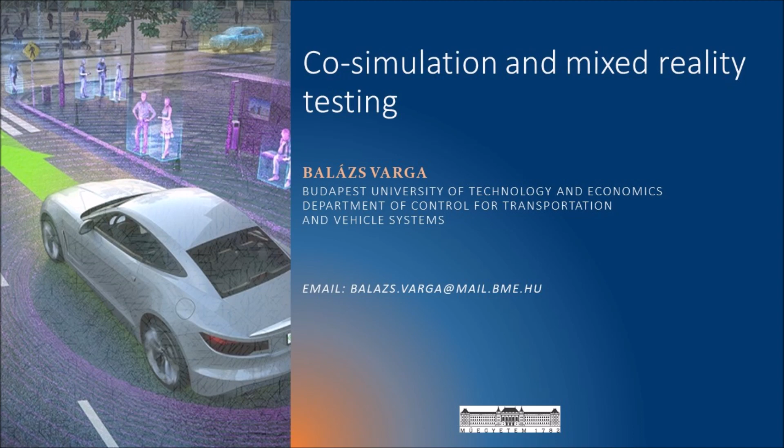Greetings everyone. In this presentation, I am going to talk about some trends in the testing of automated and highly autonomous vehicles. I am going to do this via giving you some definitions and examples of some buzzwords that are currently being thrown around in this field. The examples I am going to show you in this presentation will be mostly from our department.

We will start from an engineering perspective. First, talking about simulation, computer simulation in the field of autonomous and highly automated vehicles. What do we test? How do we test them in this field? And then we will move on to more complex topics. We will see how we can connect different simulators to perform some cosimulations, and then we will see how we can connect real objects to our simulations to perform mixed reality and digital twin testing.

I am also going to talk about the computer visualization counterpart of these topics, and I will give an outlook on virtual reality, the purpose of virtual reality in testing, and then the purpose of augmented reality in testing.

So what's the purpose of simulation in autonomous vehicle testing? Simulation is cheaper, faster, and safer than performing real vehicle tests, especially when the development is in an earlier phase, when we already have some function, but we do not have the vehicle ready. Then we cannot do it with a real vehicle. We have to limit ourselves to simulations.

In this video, you can see the software IPG CarMaker in a scenario where the ZalaZone test track is modeled and the vehicle is performing some tasks or maneuvers there. For example, you will see a pedestrian dummy that goes in front of the vehicle, and the vehicle does an emergency brake. And you can also see the force vectors next to the wheels, which indicates that this software can simulate accurate vehicle dynamics, and basically that's what it is for.

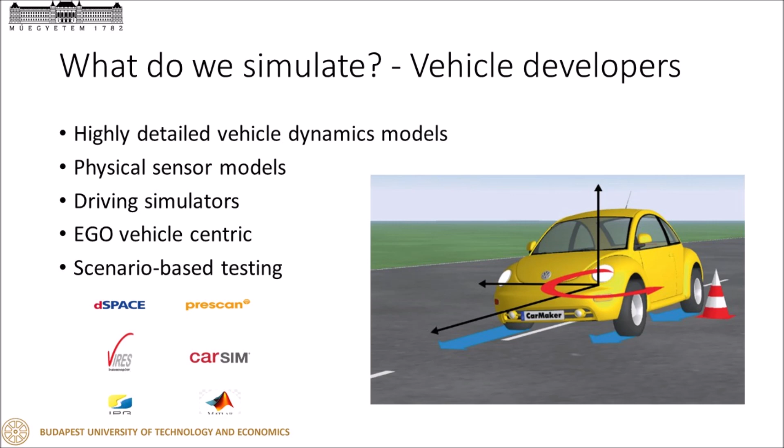The model of the test track in CarMaker, but also in other software, for example, Vissim, PreScan, also in Unity, SUMO, are available on GitHub. See the description below.

Simulation can be also grasped from a traffic engineering perspective. It's a special and smaller field, but they are simulating on a much larger scale. Traffic engineers simulate networks to support intersection design or public transport planning, to develop different signal programs and calculate origin-destination matrices. So because it's such a large-scale simulation, the dynamics of individual vehicles are not that detailed.

The next simulation is in Vissim, which is a microscopic traffic simulator, and you can see the 6th district of Budapest. It's around Octagon. It's modeled, as you can see, the graphics is not that good quality, and the vehicle dynamics are also not that good. So, for example, the wheels are not rotating, and lane changing looks weird.

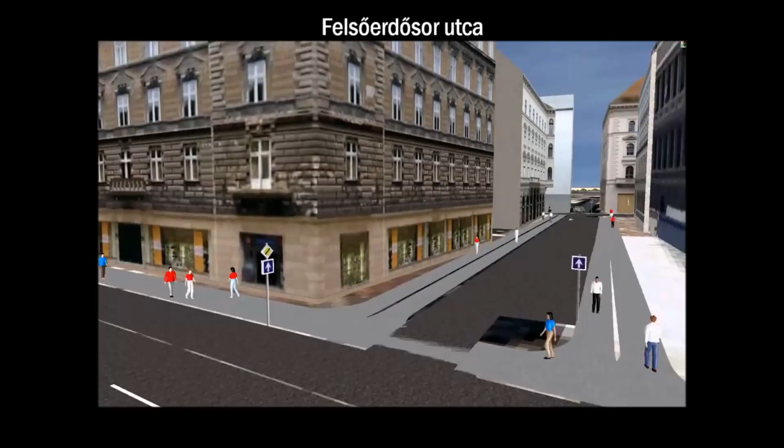You can see that public transportation is modeled too. You can see the trams, the tram stops, and passengers boarding and alighting trams. The main purpose of this simulation is to see how traffic behaves in such a complex environment with traffic lights and intersections, and provide a tool to optimize such systems.

The third point of view is from computer visualization. It has a very important purpose in the testing of automated vehicles. Using computer graphics in automotive development is not new. These are all used for 3D rendering of CAD and CAM models. They are also used in virtual showrooms, where you can see the vehicle photorealistically. Also, there are different vehicle simulators, test rigs, where the visualization part is also very important to create the immersion for the driver.

Finally, and this is where it becomes very interesting for autonomous vehicle development, it can be used for simulating virtual perception sensors. In terms of camera systems, this is very simple, because you have some very photorealistic view in front of you, and that will be the image of the camera, and that you will use, for example, for object detection or for some other algorithm. But you can also use it for radar and LiDAR simulation.

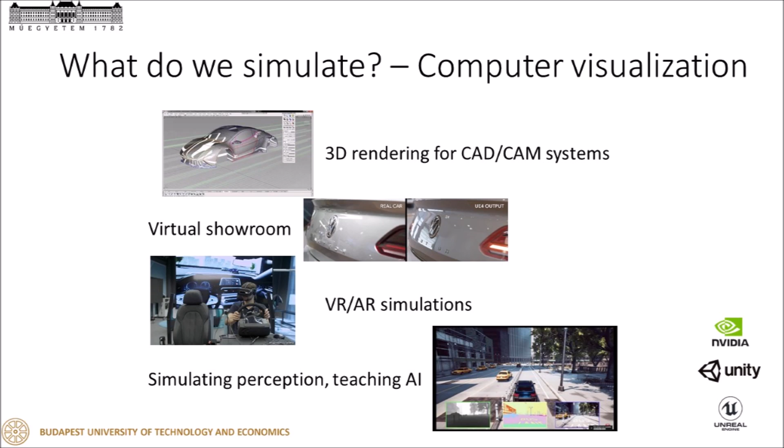These computer visualization tools are mostly based on game engines, for example, Unreal Engine or Unity. These are very general purpose, which means that you can develop whatever scenario you want. They are very flexible. So if you want, you can create your own vehicle dynamics inside the game engine. There are already such tools, for example, AirSim or CARLA, which can be used for simulating perception layer sensors and teaching AI.

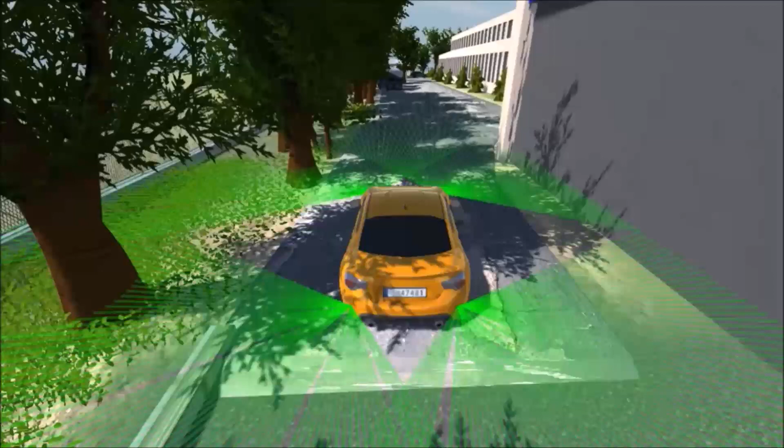In the next video, we use the game engine Unity to generate ground truth input data for a very accurate industrial radar model. Based on the raycast algorithm, we cast rays in each direction. Each ray is responsible for one radar beam, and we check the distance the ray travels, and we also calculate some radar cross-section value for that beam.

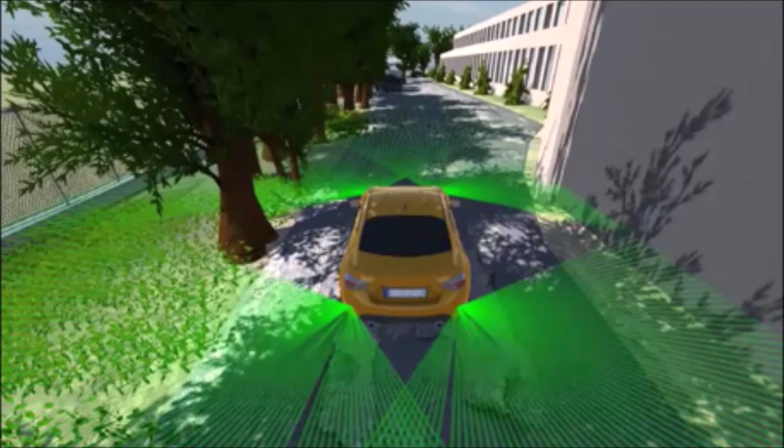And finally, we arrive at cosimulation. So we talked about the automotive industry, who has very detailed but egocentric vehicles with accurate vehicle dynamics and sensor models. We have the computer visualization field that can create photorealistic images. And we have the transportation field that can create large-scale traffic scenarios.

Previously, there was no transition between these fields because for vehicle manufacturers, it was enough to test their ego vehicles very accurately. But with connected and automated vehicles, it becomes more and more important how to interface with the traffic network or other participants of traffic on a larger scale.

And similarly, when we put different perception sensors on these vehicles, especially cameras, it will be easier to test with photorealistic images, where the automotive manufacturers did not have that much know-how, so they had to take it from the computer visualization field. But of course, all of these software can do these things on their own.

And the most important thing is the synchronization between these multiple software. It does not have to be in real time. It can be slower or faster, but they have to be in sync. This video shows a very simple example of cosimulation. Here, the traffic simulator SUMO is connected with the game engine Unity.

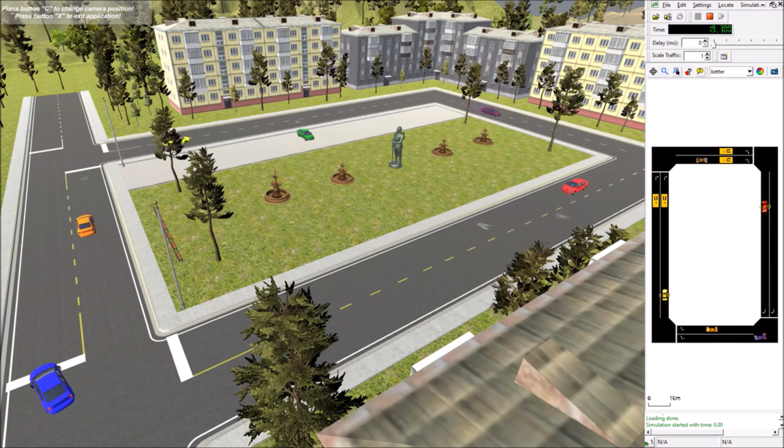The communication is only one way. The traffic simulator generates the vehicles and their positions based on some car following logic, and the purpose of Unity is only visualization because it can visualize much nicer, much more photorealistically compared to SUMO, which is only 2D. And this project is available on GitHub.

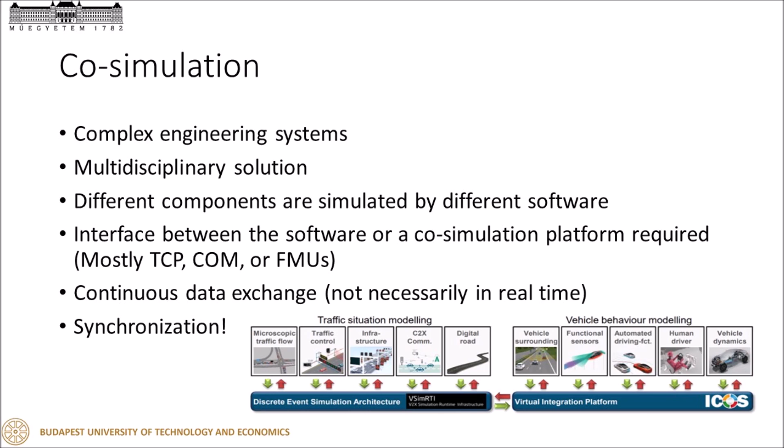But you can also connect vehicle dynamics simulators with the visualization tool, or you can have large-scale traffic simulation in a sensor simulator tool. For example, you can connect PreScan with SUMO through MATLAB. The possibilities are basically endless. You can just think of these connections and what you can do with connecting these different software. So you can just extrapolate from here. Think about it a little bit.

Next, we will talk about different levels of testing. I think you are all familiar with these abbreviations. We have SiL, software in the loop, which was basically what we talked about. It's only computer simulation with dedicated software. And then we have hardware in the loop, where we introduce a hardware into our simulation. It can be an ECU or a rapid prototyping hardware, so not necessarily the target ECU, but some real-time hardware. So it's one step closer to reality than only simulation.

And next, vehicle in the loop, where the hardware is the vehicle itself. The next question is its surroundings. It can be either on a test rig where the environment is virtual, or it can be on a real test track or on a public road. You have seen some videos on simulation, so I am not going to show it again for software in the loop, and I think hardware in the loop is not that interesting. So I will show you a video about vehicle in the loop.

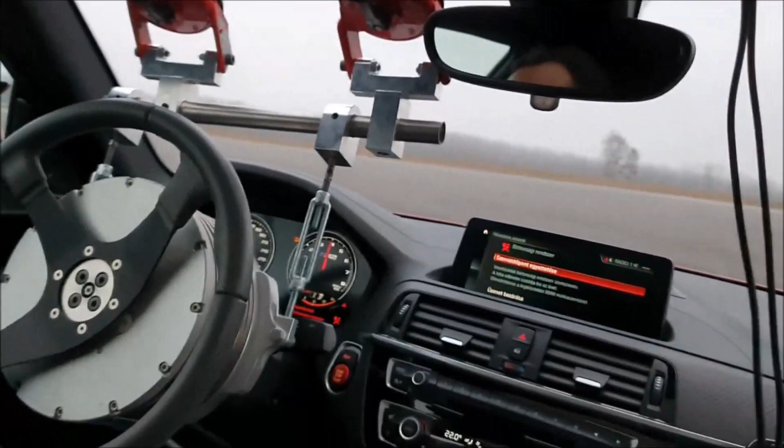It was recently carried out at the ZalaZONE test track with a BMW M2, with a control algorithm that controls its wheels and its throttle and brakes. In this example, the goal is to keep the BMW drifting, and this is done via actuating the throttle and brake pedals, and also we have a steering wheel robot that actuates the steering wheel. That's the hardware that's in the loop. And the algorithm that we are testing is the control that keeps the car drifting.

Vehicle in the loop testing is of course much more realistic than simulation, but it's also much more expensive, and there are corner cases, as we have talked about, that we cannot test with vehicle in the loop testing. And the next step, which I think you also heard a lot about, is scenario in the loop testing, which requires a proving ground.

But once we have a proving ground, we can not only put the ego vehicle into the loop, but we can also put the whole scenario, so the test track and the objects on the test track, into the loop. We can control the whole simulation at once. And with the help of scenario in the loop and vehicle in the loop testing, we will introduce mixed reality

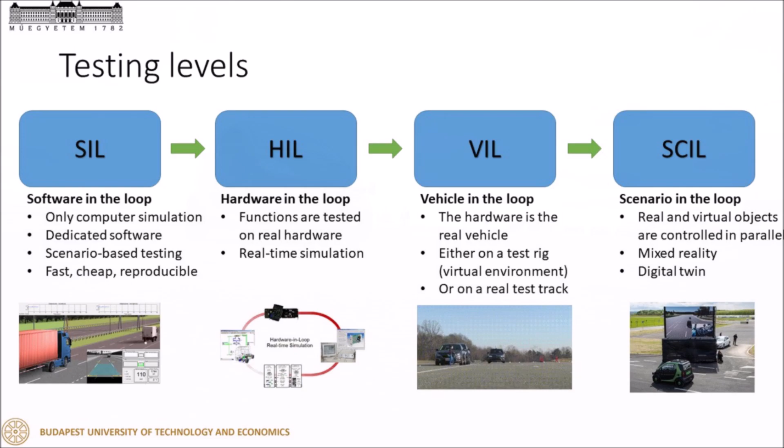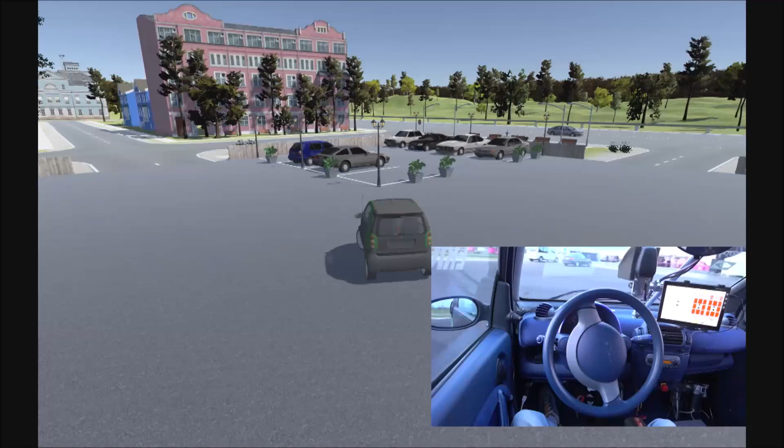and digital twin. And in this scenario in the loop example, we have the Smart, that is the real vehicle, and we have its digital twin. So you can see that the two are moving in parallel, and if the real vehicle stops due to an obstacle, the simulated vehicle will also stop because the GPS position is communicated to the simulator.

When we put a virtual obstacle in front of the virtual smart, both vehicles will stop, because we send back virtual sensor data, virtual LiDAR data of the virtual vehicle that detects the virtual obstacle that only exists in virtuality. We can send it back to the real smart, so that will stop too, because it thinks that there's a real obstacle in front of it, but it's only virtual.

You can also see a pedestrian dummy that goes in front of the real car. It does not exist in the simulation, by the way, so it's only in reality, but it is controlled by the control software. So this is why we say it's a scenario in the loop, because we control the whole scenario: if the real vehicle is at a given position, then we will launch this pedestrian dummy in such a way that it goes in front of the smart, so it forces it to stop.